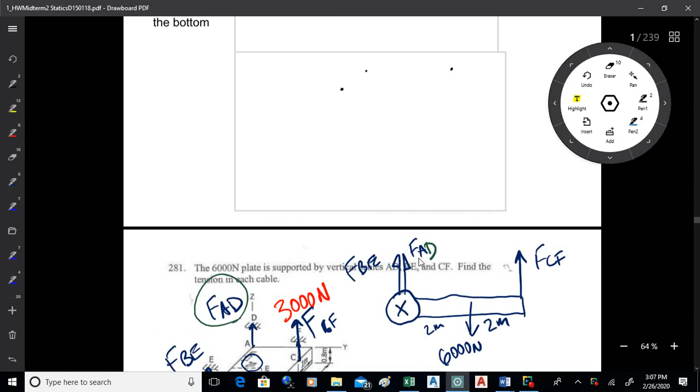First one I just wanted to mention is that one, it was a while back. It was just that one with a couple, so it's really quite a while back. But why don't we just go over that real quick? This one.

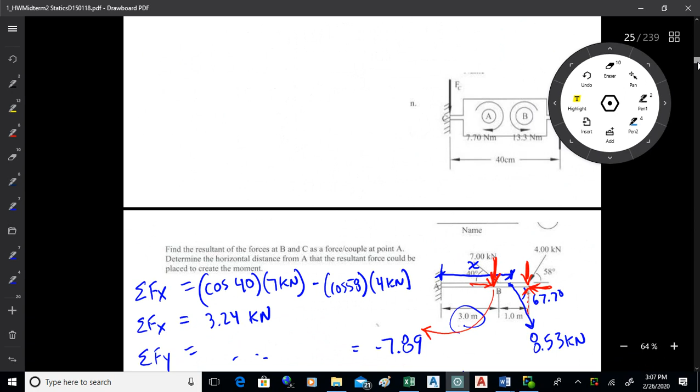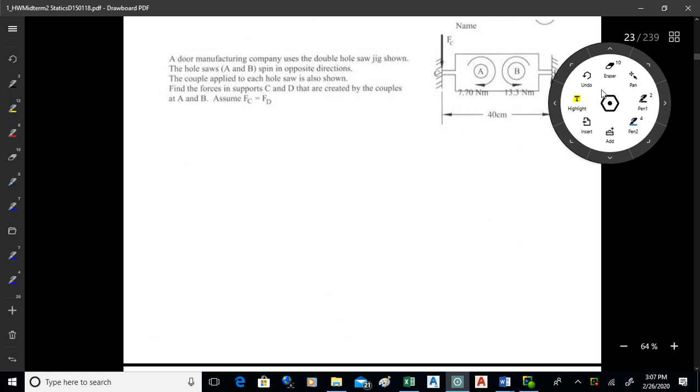So what you want to do on this one is you're taking - now this is not an equilibrium problem, this is more like a resultant. We want to find the net effect of those couples on the supports. The forces are in the direction shown. This is problem 221, I think it is.

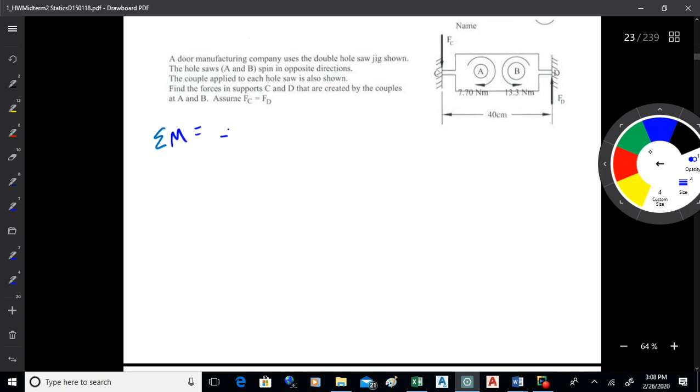So what you would do is go to sum of the couples there and find what those are. The sum of moments there would be - clockwise would be negative 7.70, counterclockwise would be 13.3. So when you add those, you get the net, and I believe that's 5.6 Newton meters, okay?

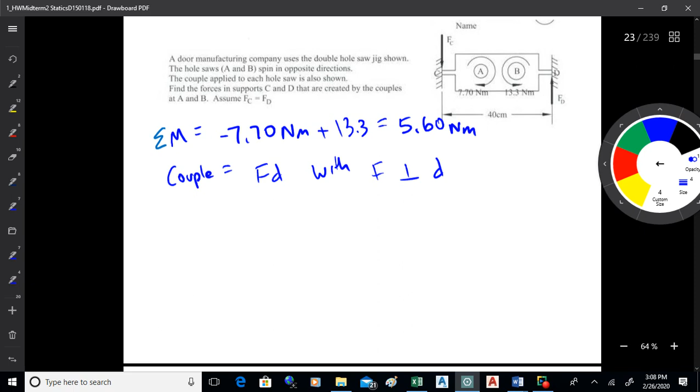And then what you're doing - a couple, by definition, is force times distance, with the force perpendicular to the distance. So all you have to do is take the 5.6 Newton meters and divide it by the distance between the two, which you see there is 0.4 meters. So that's Newton meters, and you come up with 14 newtons.

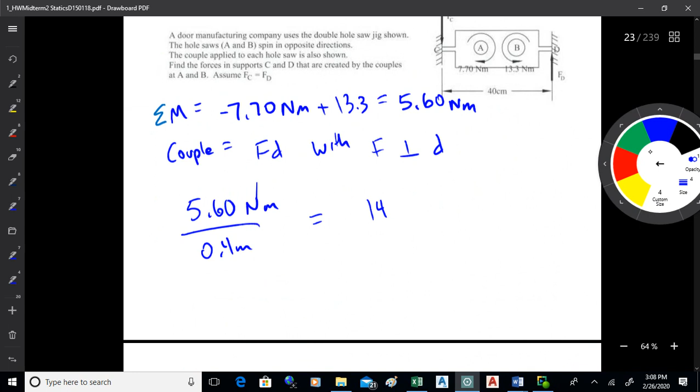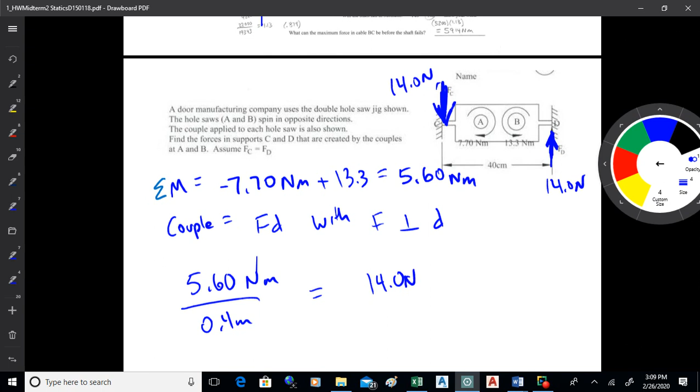So what would happen there, if you're looking not at the reactions - again this is a resultant - at the effects on those forces, is you would have two 14 Newton forces like that. They're equal and opposite to get the couple. That's problem 221, I think. I handed that back a while back. All right, so that's that one.

Now we're going to look at those zero force members, so let's have a look.

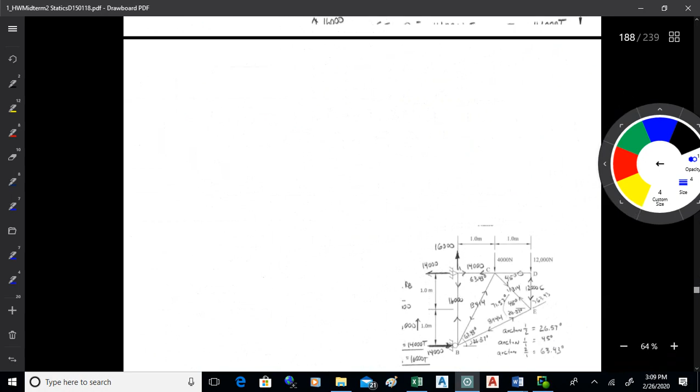Here we go. So all you need to do is pull the page out of your book - I believe it's page 18 - and I just want you to mark the zero force members with a 0. The goal here is to get where you can identify these things just by looking at them. They come up sometimes in trusses, so we want to find them. Essentially, when you find them, you take them out of the truss - you don't want them in there any longer. So yeah, this is page 18. All you're going to do is pull page 18 out of your book, put your name on it, and mark the zero forces with a 0.

All of them? On all 5, yeah. Okay, so just find them is what I want you to do.

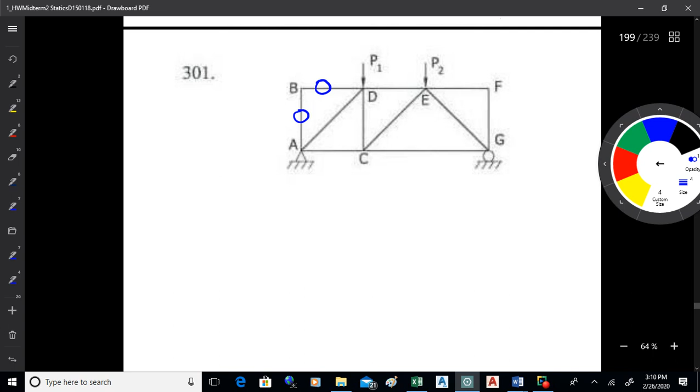All right, now here there's 2 zeros right there. That's an unloaded corner, which is one place where the zeros are. If you go sum of Fx and set that equal to 0, you'll see that that equals FBD. And then if you go sum of Fy and set that equal to 0, that will be FAB. And the free body diagram I'm working with is like so.

Now there might be a couple other zero force members in that truss, but I'll let you figure them out. I don't think DC is, because there's just too much going on. You've got at joint D 1, 2, 3, 4 unknowns plus a load - too much to analyze. At joint C, 1, 2, 3, 4 plus a load.

So that's too much. What you're looking for usually is anytime there's a symmetrical triangle with something in the center of it, it's 0. Actually the things I'd be looking for on these would be unloaded corners, and that's what the example is right there. ABD is an unloaded corner, so that's a very good instance where you have zero force members. The other common situation is unloaded T's - that's the other one. So those are the things you want to be looking for, and you can always prove it to yourself by drawing a free body diagram of one of the joints.

And then do force equations to show that it's zero. I would point out that BD, you would never be able to see that at joint D because there's just so much going on there that you would not be able to identify BD as a zero force at joint D.

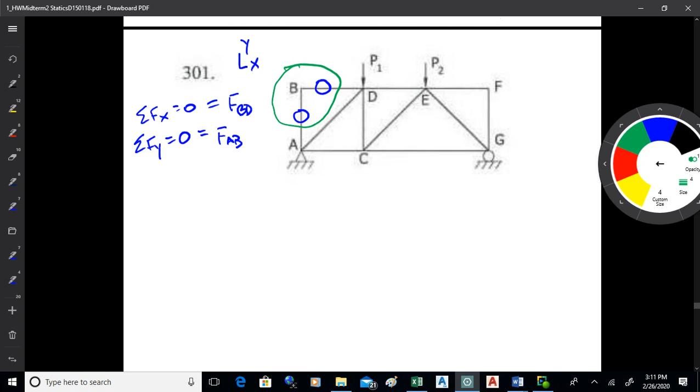Okay, this one here, what you could do is look at joint C, I think, and you could identify FC as zero. Now, as I just mentioned, you're never going to see that if you look at joint F. There's, again, too much going on. But if you look at joint C...

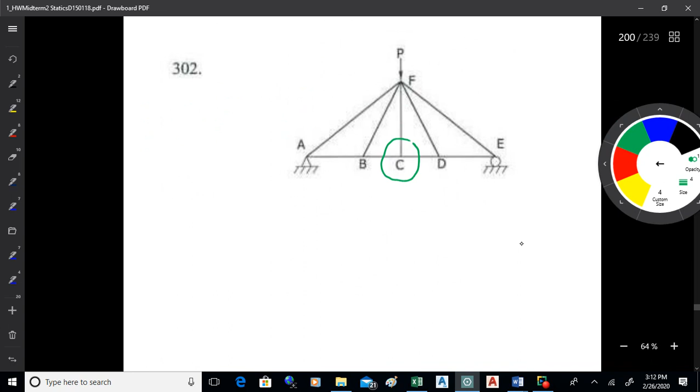you should be able to go sum of Fy equals 0, and that will be CF. You could also look at joint B and come to a similar conclusion about sum of Fy equals 0.

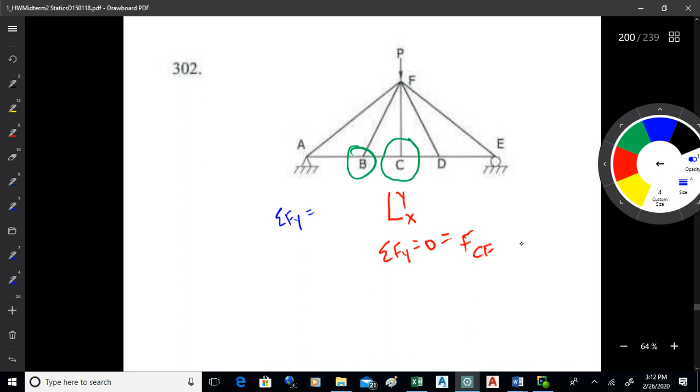Now you have an angle in there, you could call it theta. That would be sine of theta times whatever FBF is. But it doesn't matter what theta is. All theta does in this instance is function as a coefficient.

So if that's the case, it doesn't matter, right? If you've got some sine of some angle, that's just some number between 0 and 1, and you would multiply that by FBF. You would still conclude that FBF is 0.

So is all the weight on AF and EF? Yeah, what's going on there when you transmit that load down through those members? The only two that can hold much of anything are AF and EF because they're supported. The other ones will start to sag a bit, but before they can sag much at all, AF and EF are going to pick that load up. That's what's going to happen.

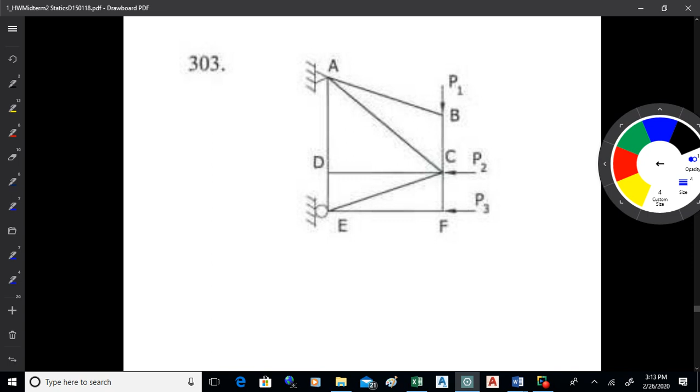So there might be another zero in there, I think. Okay, we're good with that. All right, we've got some others in here.

All right, I think if you look at this joint right here, you can conclude from that that you've got a zero right there. I better mark these, and be consistent with how I'm marking them. I want you to put zeros on them, it's just easier for me to see them that way, okay?

So right there, see, again, you might have an angle in there, call it theta or whatever you want. If you go sum of Fx at that joint equals 0, what that's going to be is the sine of whatever that angle happens to be times FAB. So FAB then will be 0.

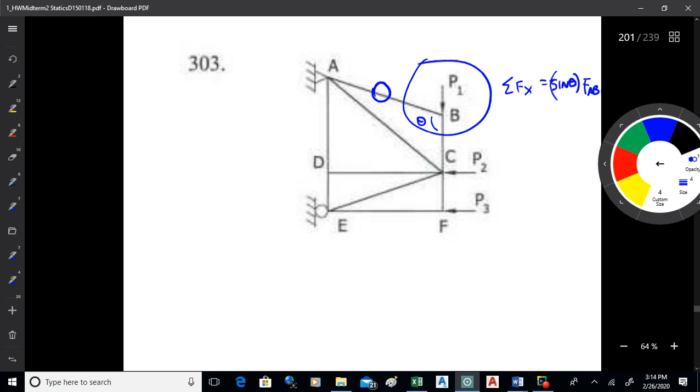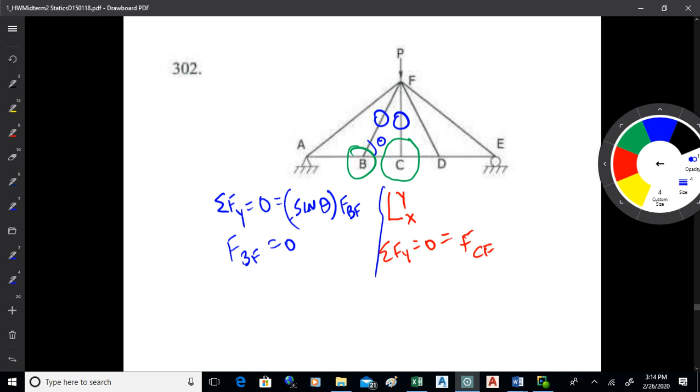Could you go back to 302 for just a second? Yeah, 302. How come that B wouldn't be a zero force member? Well, I didn't say it wasn't. I said there's some more in here. I'm not picking them all out for you. I'm just showing you a few examples. So, yeah, I'm not getting them all for you. I don't want to take all your fun away.

303, wouldn't the compression from B to C create tension in A to B? It wouldn't. Now, what's happening there? We're not looking at what would happen so much as what doesn't happen. You have to look at these in a certain way, have a certain mindset. What's going on? B is in equilibrium, and so it has to be in X equilibrium. It has to be an equilibrium in the X direction. If that's the case, then there can't be any force in AB, because if there is, it will throw that joint out of X equilibrium, it'd be moving. So now I understand you're saying wouldn't there be tension there because you're compressing BC. You think of dragging B a little bit, you get some tension.

We're not really considering the deformation of the members so much. We're not there yet with our analysis. The assumption is that P1 is exactly in line with BC and that BC supports all of it. It's like perfectly perpendicular, perfectly vertical, perfectly in line.

So the fact that this X direction is in equilibrium leads us to the conclusion that AB is 0.

So there you go, this one I'll let you look at. Now, I will mention that there might be some that don't have any zero force members. I just want you to look through this and draw your best conclusions. Mark any zeros you see with a 0. If you don't see any zeros, don't mark anything, that's okay.

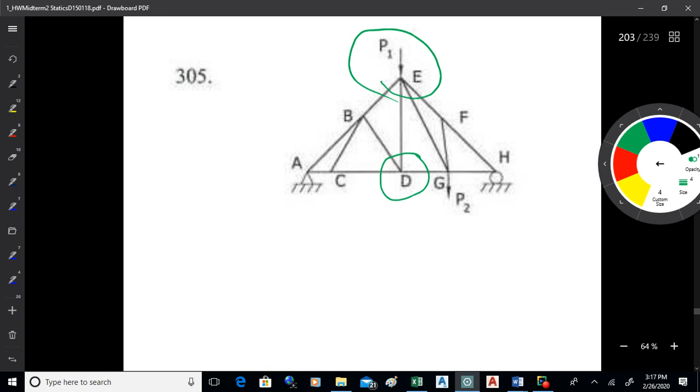This one here, do y'all see any zeros on this one to start? Again, what you do to find zero force members is look at joints. When I look at joint E, just 1, 2, 3, 4, and an extra force, I can't conclude anything by looking at that joint. Same thing with D, I got 4, and again the equilibrium could happen in many different ways there.

How about BC? Yeah, I think that's probably a 0. What we'll do is sum of Fy, set it equal to 0. Whatever that angle is there, the sine of that times FBC will be the y component, and that's the only thing acting in the y direction. So from that, you can conclude that FBC is 0.

Now, once a member is 0, you can take it out of the truss. It's like it's not even there. And if that's not even there, you can come up here, and remember, you can incline axes.

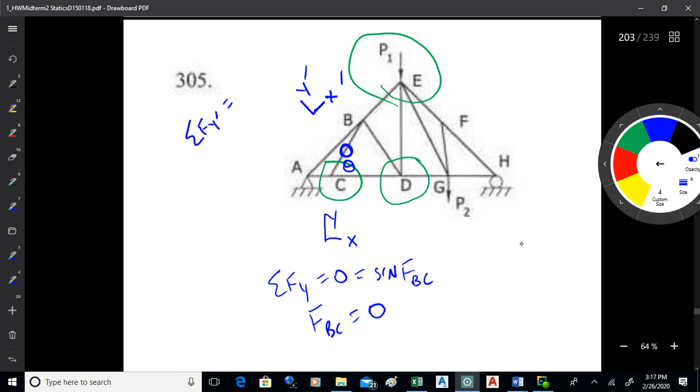What you can do then is sum of Fy prime equal to 0. And what would that be? About B to D? Yeah, B to D. See, we've got an angle in there, we're going to pick up a sine of whatever that angle is, phi. But then the only thing acting in the y prime direction is BD, so you can get that FBD is 0.

And there might be some others in there, I think there are. I'll let you go ahead and find them. I just wanted to show you a couple of those.

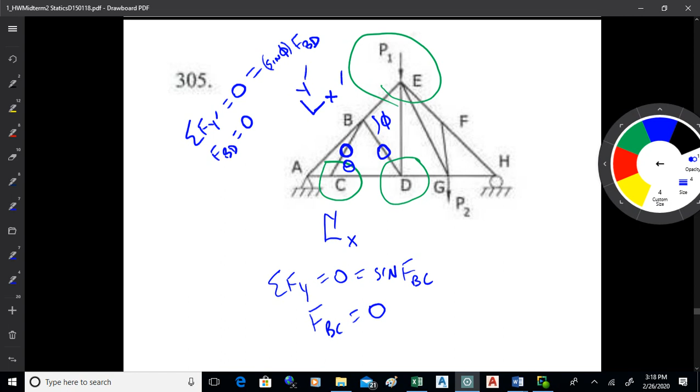The key thing is you write an equilibrium equation for a joint to prove that one is 0. The common places where you find them are unloaded corners with 2 members and unloaded T's with 3 members. You could call this a special case of an unloaded T because there's a force which you could think of as almost being like a member. There's the member, then the third one's here. So the third one, the one not in line with the other two, is 0. You might think about it in that fashion.

So I just want to get you some practice on this so you can identify the ones that are 0 and just eliminate them out of the truss. That's often an early step when you're analyzing a truss. If you can find those zeros, you just take them out, and that makes the rest of your analysis easier.

So we doing all right with that?